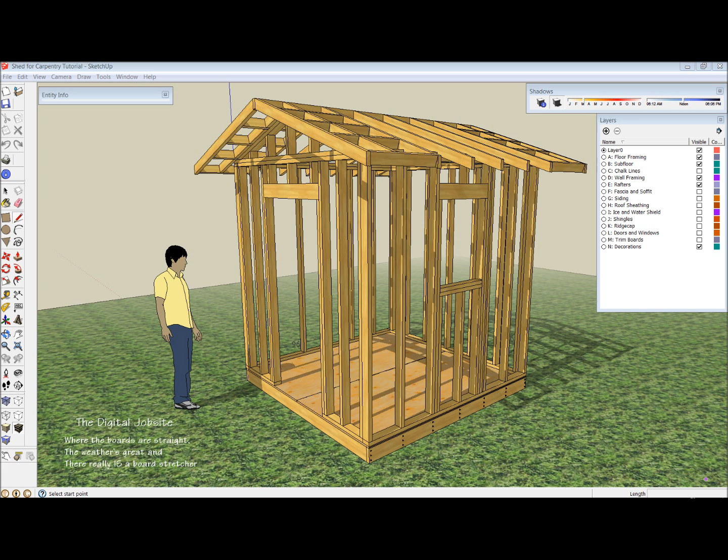In this video I just want to go over briefly the assembly process and principles of squaring up the floor framing to put the subfloor on. So we're going to turn some layers off here and get down to the part of the model that we're going to discuss, and that will be the floor framing itself. All you're looking at here is 2x6s used to frame this up.

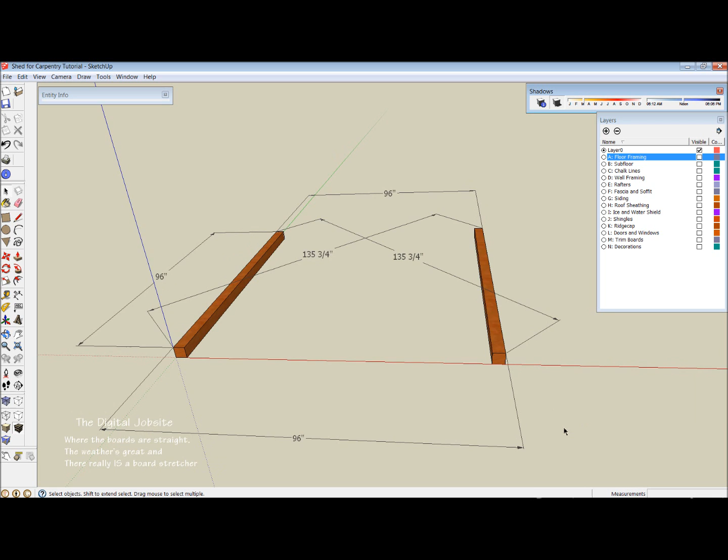If I turn off the floor framing, we're left with nothing but a couple of 4x4 sleepers, or a foundation more or less in this case, and a bunch of dimensions. I'm going to assume that the site where you'll be building a shed is relatively flat. To accommodate the shed being built flat, a person would need to have an area roughly 8 feet square, and have it level. You could do that by cutting these 4x4s exactly 8 feet long to start off with, and then laying a 4-foot level on the top of them.

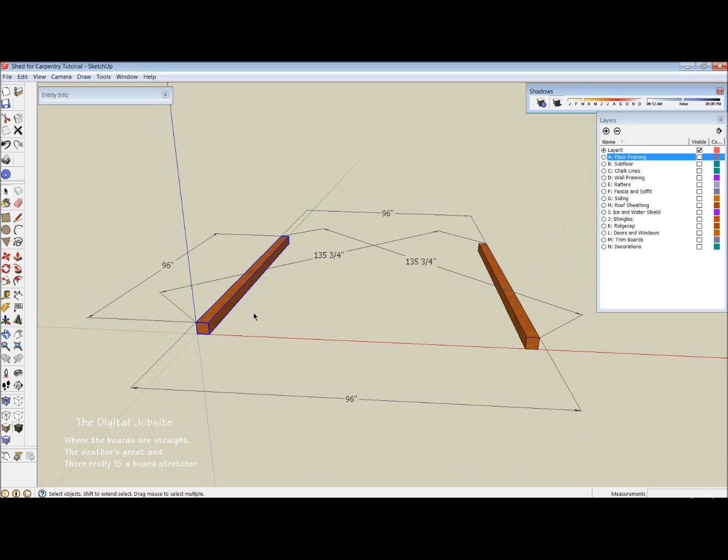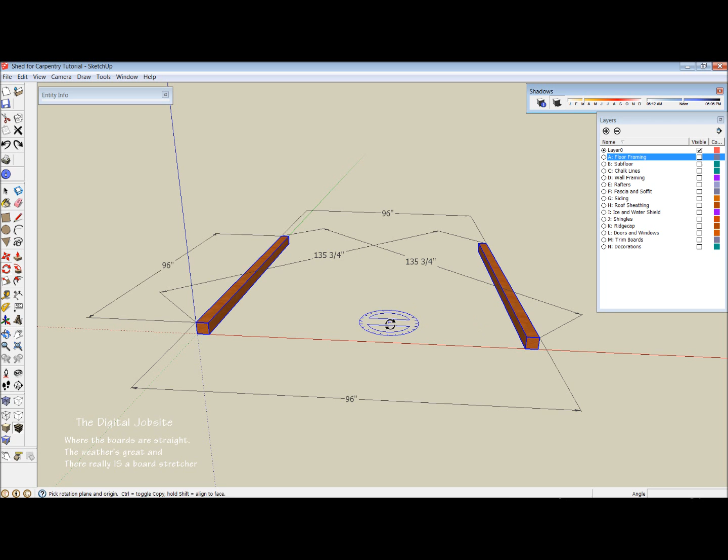A person could turn the two 4x4s 90 degrees and re-level them, and that would make an area that was level enough. Some of the video series on Fine Homebuilding for the tool shed and the garden shed, I believe those go through the process of using concrete blocks buried in the ground to establish a level platform for building a shed on.

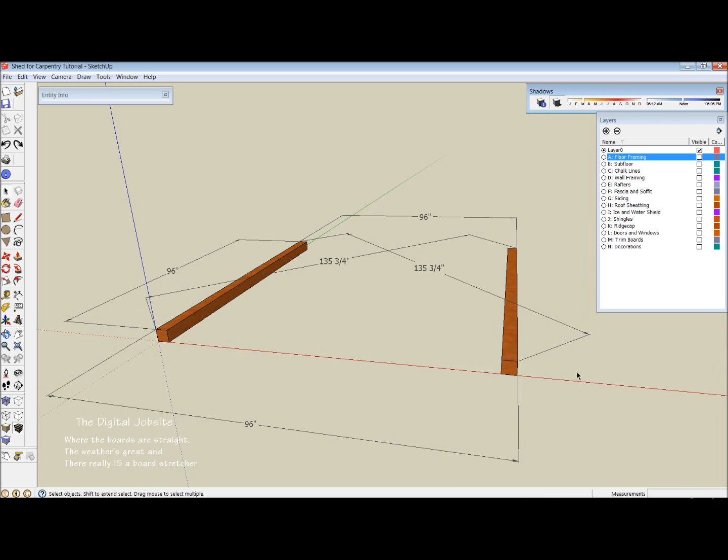But to keep this video simple, I'm just going to assume that you're working with an area that's flat enough, and with that advantage, a person can just lay 4x4s down on the ground, put the 2x6 framework on top of it, and then square it up. So that's what I'm going to talk about here. Oops, not the subfloor, let's take the floor framing.

I've got this geometry grouped here, so I'm going to explode the group and take one of these members here, the rim joist. Although I have the move tool, it keeps coming up with that rotate icon that I don't really want at this point. I'm just going to slide this one over this way 96 inches. If you're doing layout work, you've probably seen this already. It's nothing new, but carpenters tend to use hash marks.

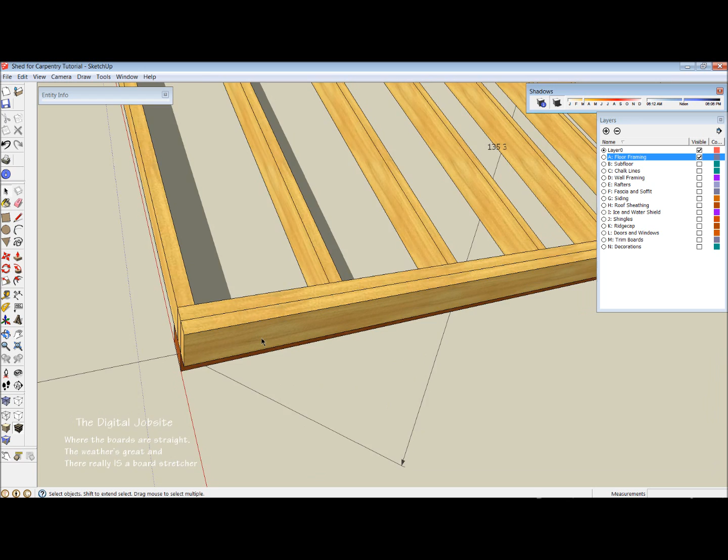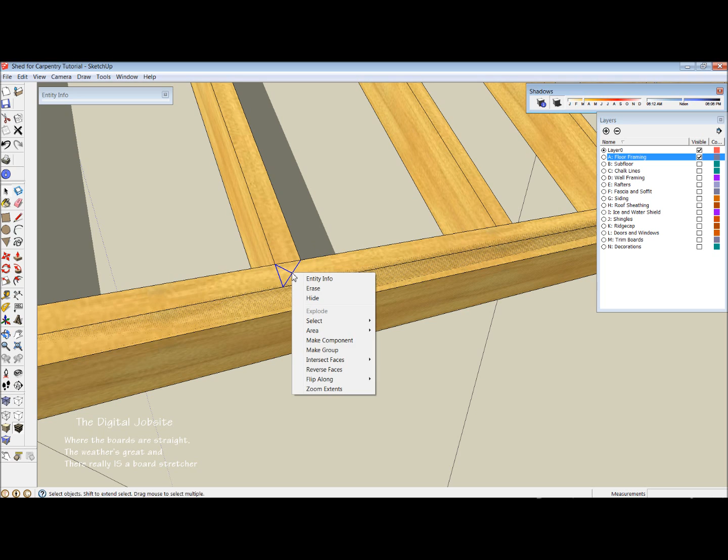I'm going to create one here. I'm just going to draw a 1.5-inch line, and then I'm going to draw an X on it like this, and we're just going to make this little thing here. I'm going to delete this little thing first, then we'll take this and make it a group. What this would be is a typical layout mark. I explained in the first video that starting at the end of a structure, you want to make sure you have your layout centers going to the center of the first member.

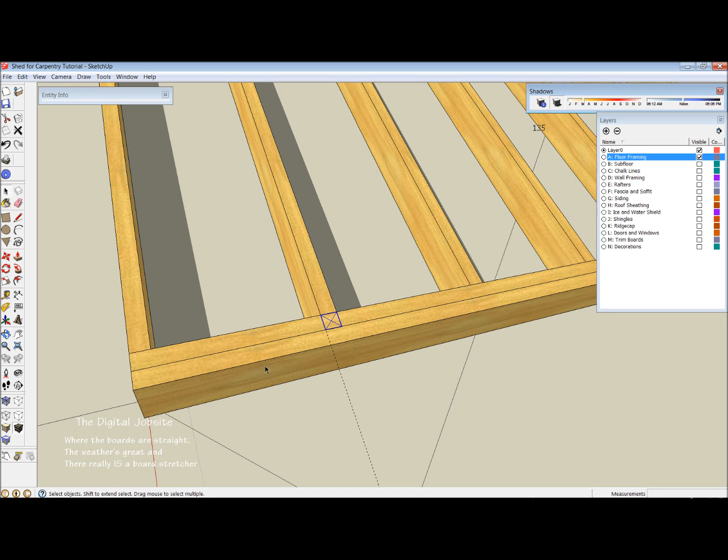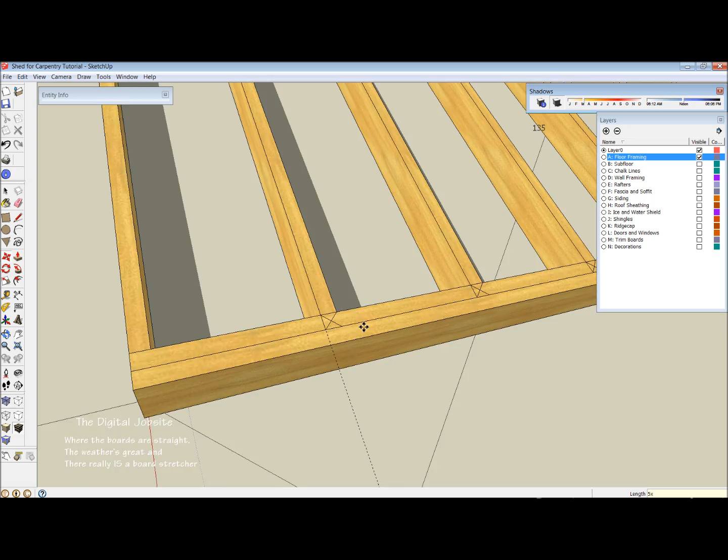In this case, it's 16 inches, but the first layout line goes to 15.25, and then these are copied, laid out with a tape measure. Oops, I missed my target there. These are just moved, laid out with a tape. We're going to go 16 inches, enter. Let's go 5x, enter, and zoom out. You can see we ended up with an extra one down here at the end, which we don't need. But that's what the layout looks like.

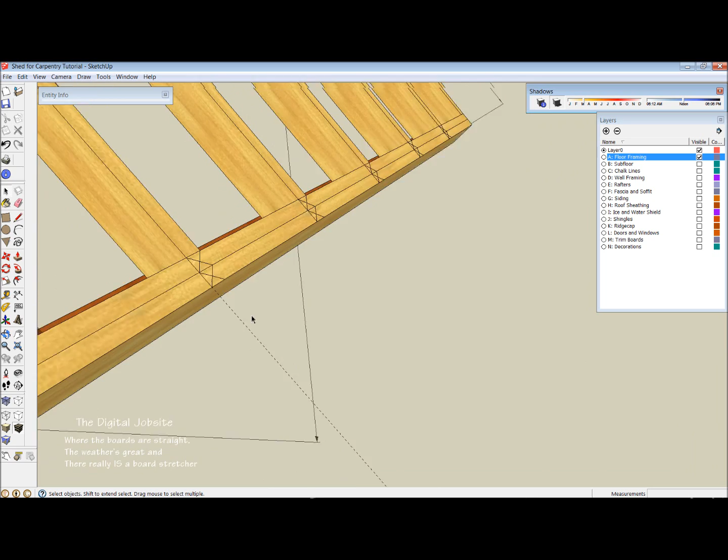If you were to lay out these plates, I would just make the layout on one of them and then transfer it to the other board. That's typically what a 16-inch on center layout would look like. Line up the edge of the board with the line, and then the member falls on the X side of the line.

So I'm going to take that, and let's see, I'm going to delete that. I got a little clumsy here on my process. As you can see, I didn't work this out before doing the video. So I'm selecting and deleting things.

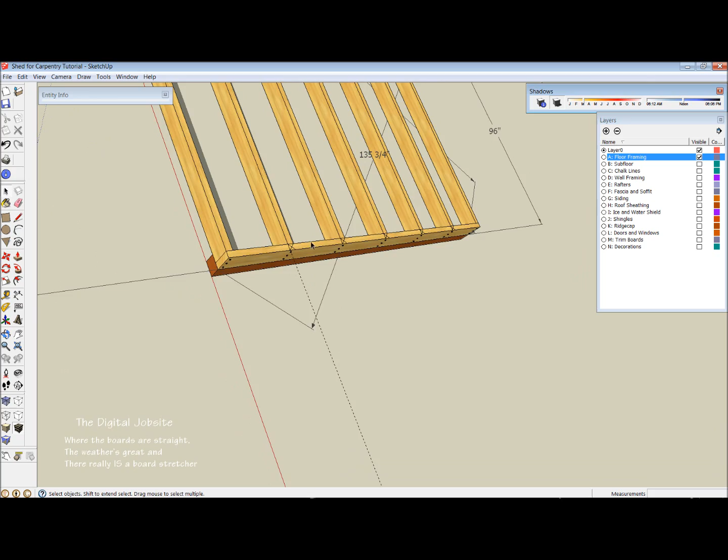Okay, so now I can take this and the marks. I'm going to make a group out of that. And I'll just copy this group over to the other side.

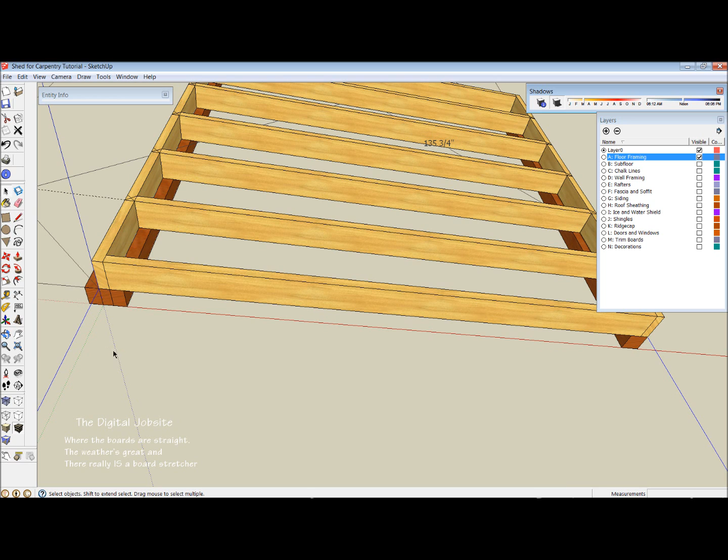Looks like I included a 4x4 in my group, so I'm going to explode that and delete the 4x4 out of it. Okay, what I was showing you there, rather clumsily, is the way to do layout: just by pulling a tape measure, drawing a straight line, squaring it up across the two rim joists, and then separating them.

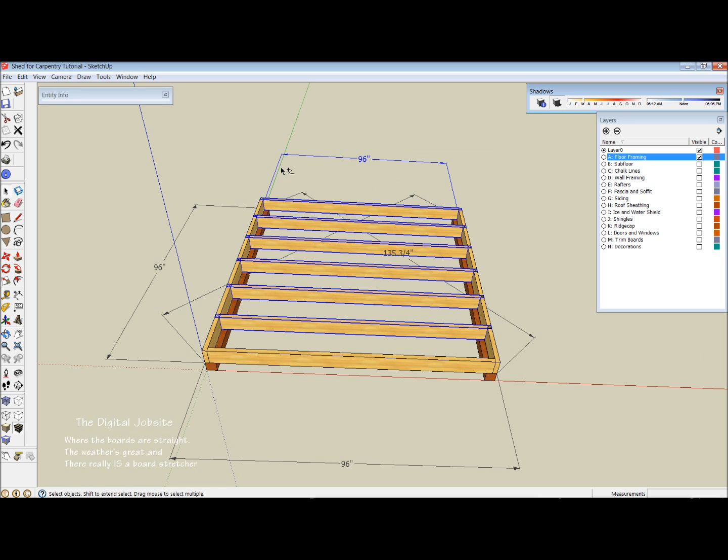All the joists in here are cut to the same length, and we want to end up with 96 inches of total width to fit our plywood and siding, etc. So the joists are cut at 93 inches. If I take these joists out of here, it kind of shows the process, and I actually put nails in the end of these joists, made little nail components, so that you could see a typical nail placement.

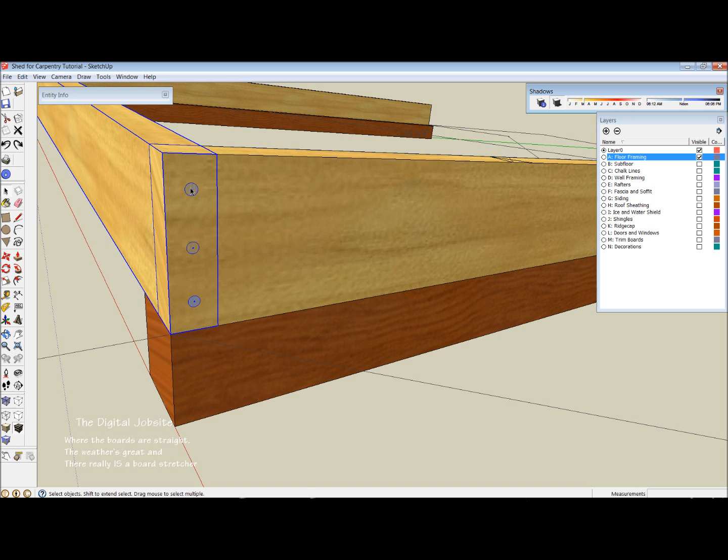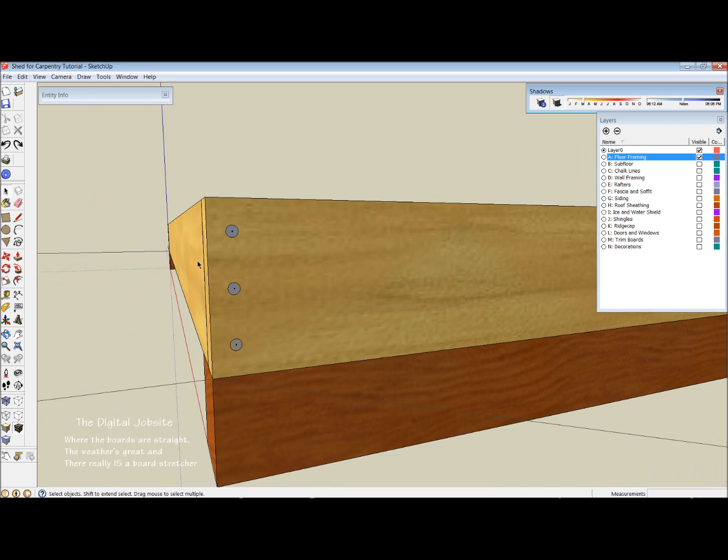The 3 nails is good. It keeps that board from twisting, and this nail should be 3/4 or an inch from each end. Those nails driven straight in to get the best holding on that floor joist. Another thing that you'll want to make sure you do is, while on the Digital Jobsite the lumber is perfectly straight, in the real world lumber almost always has a crown to it. When you eyeball it down, there's a hump in it in this direction.

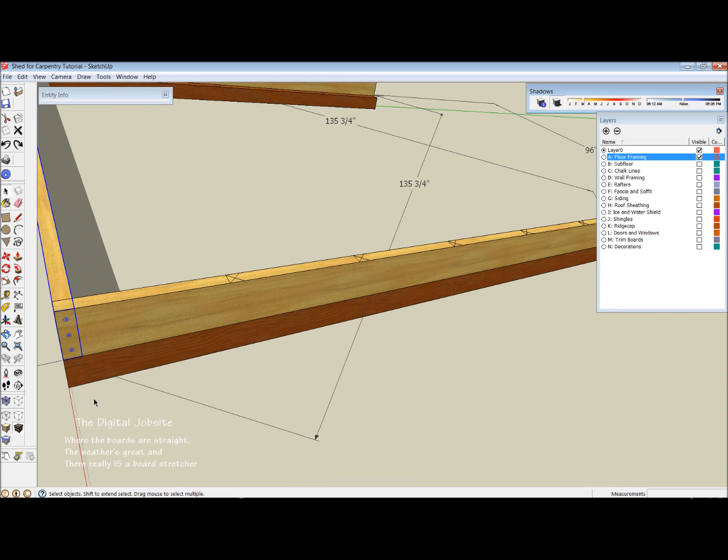Put that hump up, the crown up, so that then when weight is put on the floor, it straightens out the lumber. If you put it in crown down and add a load, it just makes the sag worse. So we would just take and nail joists in on each of the marks. Just going to move one over here.

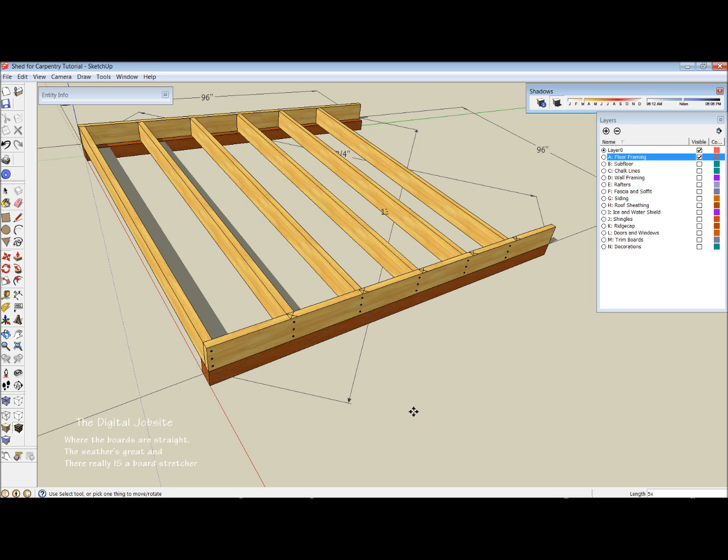This is where the Digital Jobsite's a great thing, because I can just say 4X, and I have all the joists in there, and you can see what I did there is I moved that joist over 15 1/4 instead of 16 inches. So I'm going to back those off. We'll move the first joist, move it and copy it, the layout, and then I'm going to move and copy again. The first one, move 15 1/4. The rest of these will be 16 inches. And we'll go 4X, enter.

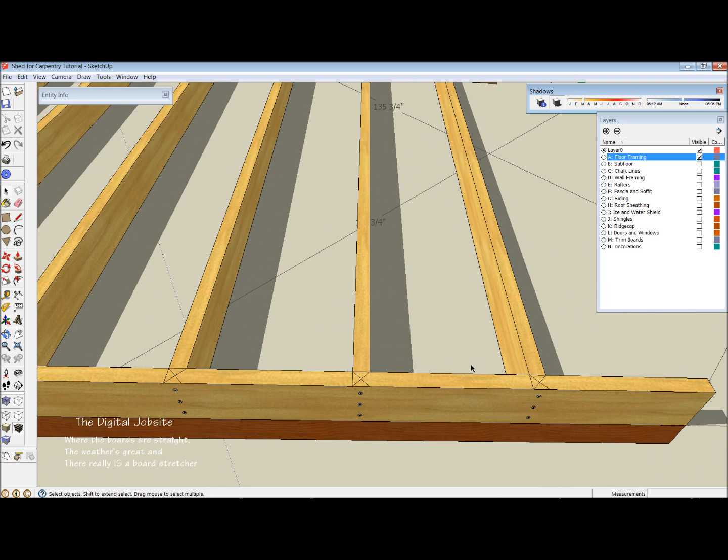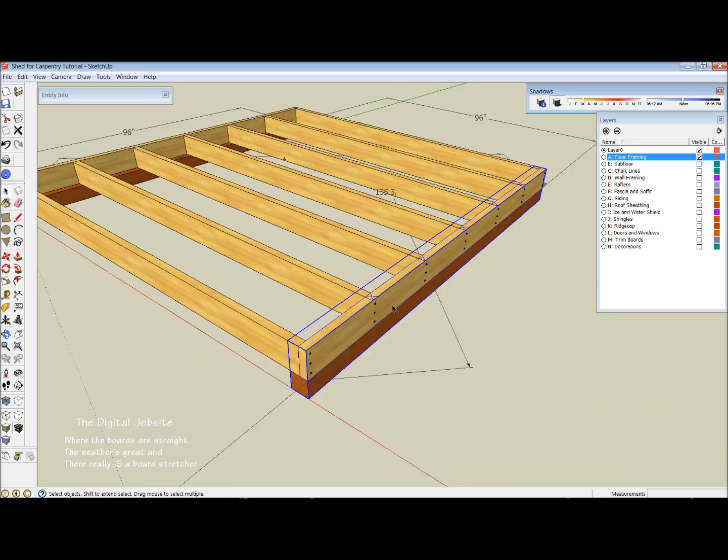And then we take one more copy and move it out to the end. So you can cut these boards. Make sure that if you buy an 8-foot 2x6 at the lumber yard, chances are it'll be 8 foot and a half inch or 1/4 inch. So trim up and square up the ends and make it exactly the dimension you want. In this case, 96 inches. Same thing with these center joists. Make sure they're all cut accurately. And you'll have this floor framework set up.

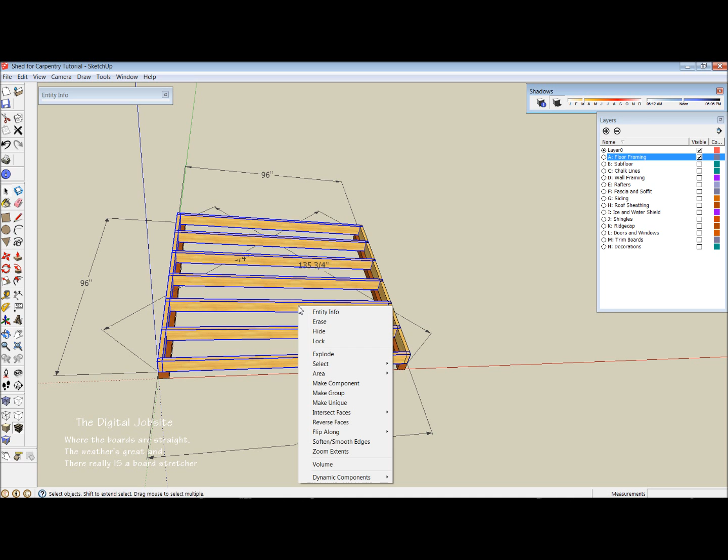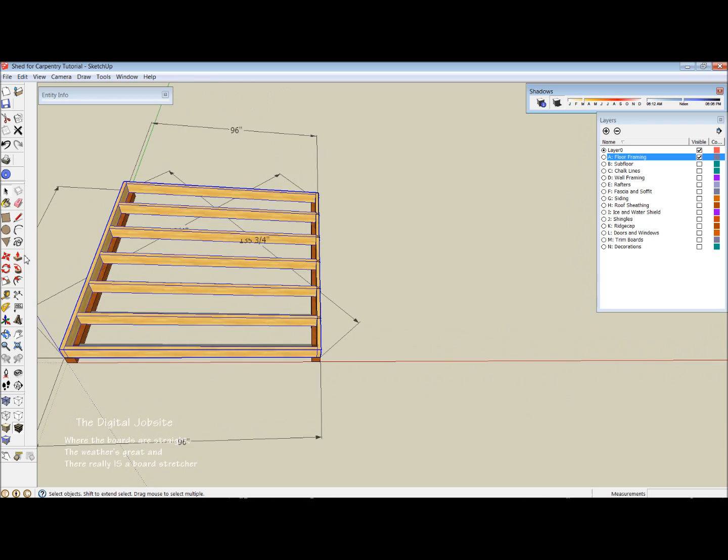I'm just going to regroup this. See if I can select it by pivoting around. I got all those joists, and I don't want to include that measurement. So by holding Shift, I can delete it from the selection. Right click and make a group. So in this case, I have this floor joist assembly, and it's equal width from one side to the other, and the two rim joists are the equal length, but the whole thing might not be square.

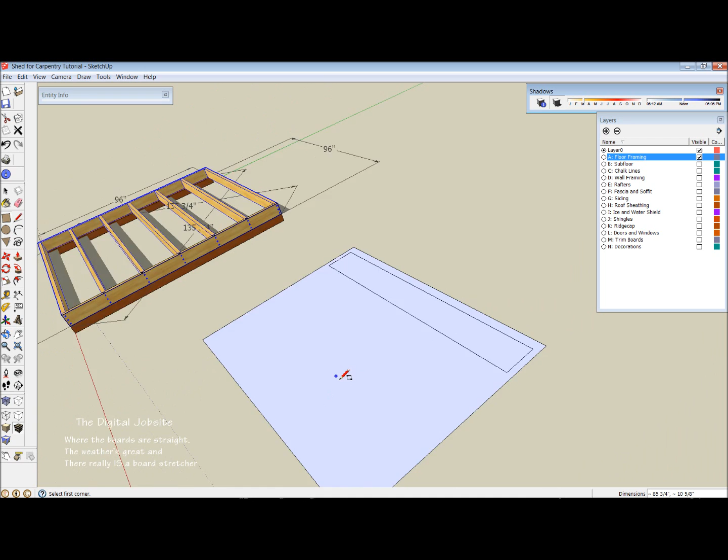And so I'm just going to do a quick demonstration here of how square works, and show you this. I can't do it with that group of components because the way the geometry is set up, it wouldn't behave. So I'm just going to draw this quickly. Let's see, 4x, enter. 3x, enter. Okay.

I could have drawn this ahead of time to save time on the video, but I did not. This way you get to watch me fumble around and draw a little bit.

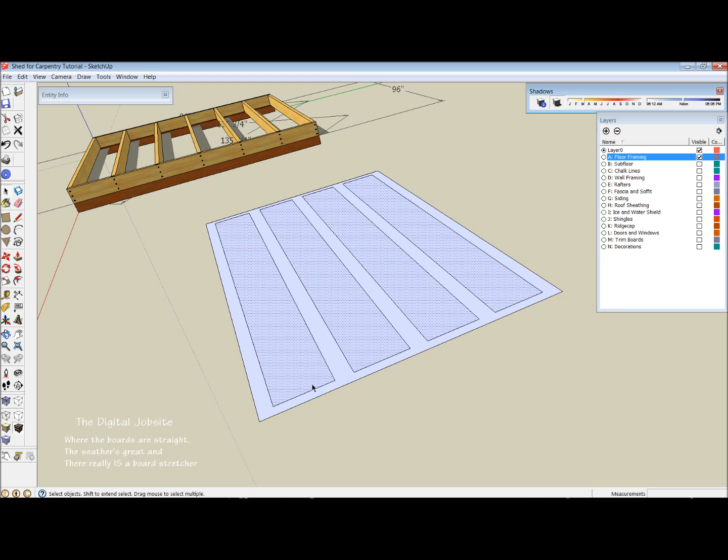I'm holding shift, selecting these areas and getting rid of it. Okay, so now we have this little bit of geometry, and you can see that it roughly represents the top of these floor joists. So I'll put a couple dimensions on here. The actual dimensions are irrelevant. I'm going to show how it's squared. You can see when it's squared up.

So there's the width and length, and then we'll click a couple diagonals here. We have to make SketchUp behave so that it goes on the diagonal. Drawing this stuff on the Digital Jobsite, everything comes out exactly square the way we drew it. But as I was describing, just because the two sides are equal length, the diagonals might not be. You might have a parallelogram, and I can demonstrate that with the move tool here.

So if I shift this, you can see that although the 89 and 7/8 stays the same, the diagonals are different by almost 10 inches, and that's an out of square situation. So once this is shifted into place, the whole assembly ends up square.

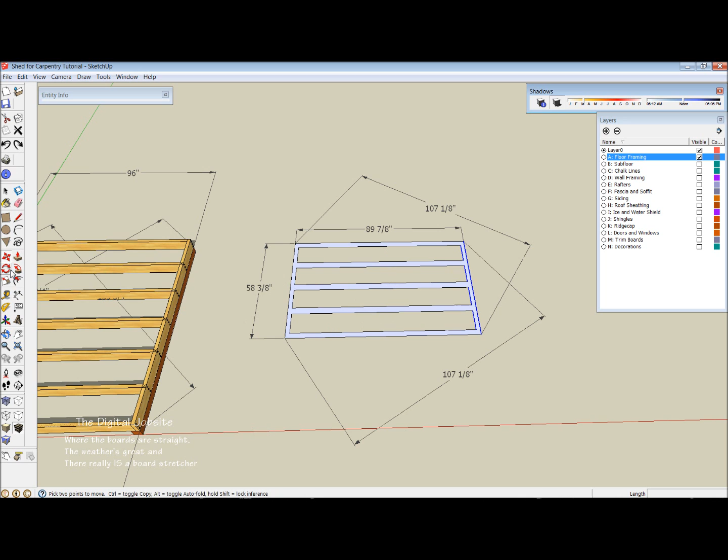The other thing, if the joists weren't cut the same length, you would have a situation like this. Let's see if I grab the right tool. I did. So this is another way it can be off and out of square if the floor joists weren't all the same length.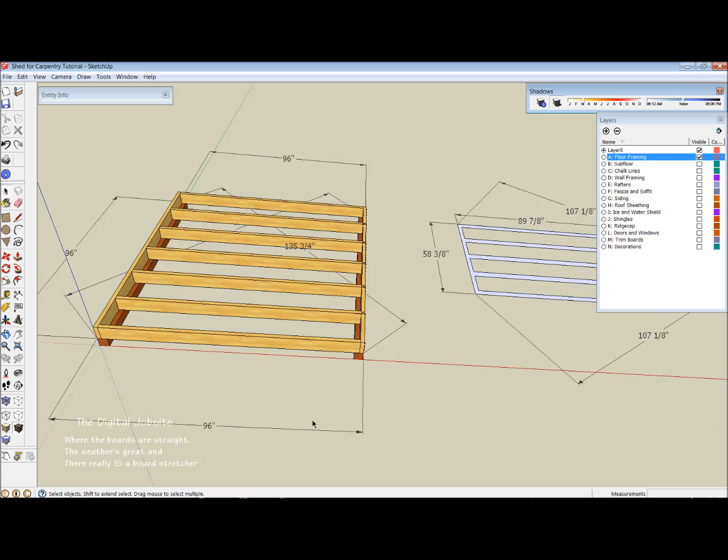So with that in mind, after you've built this assembly with the rim joists, 4x4s, and floor joists, it might not be square. And I'm not really going to get a true indication of what that looks like by sliding this floor joist, because it's not really connected the same way. But I guess maybe it demonstrates a little bit more what I had in mind. You can see how the diagonal dimensions are becoming unequal.

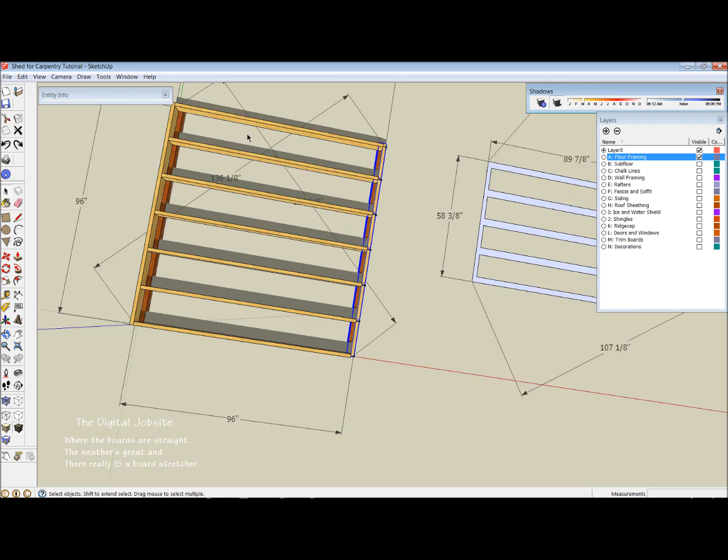So when your floor assembly is all put together and nailed up, you could stake one side of this down to the dirt with a couple wooden stakes and slide the other side back and forth until the diagonal dimensions are equal. Then you know it's square enough to put the plywood on it.

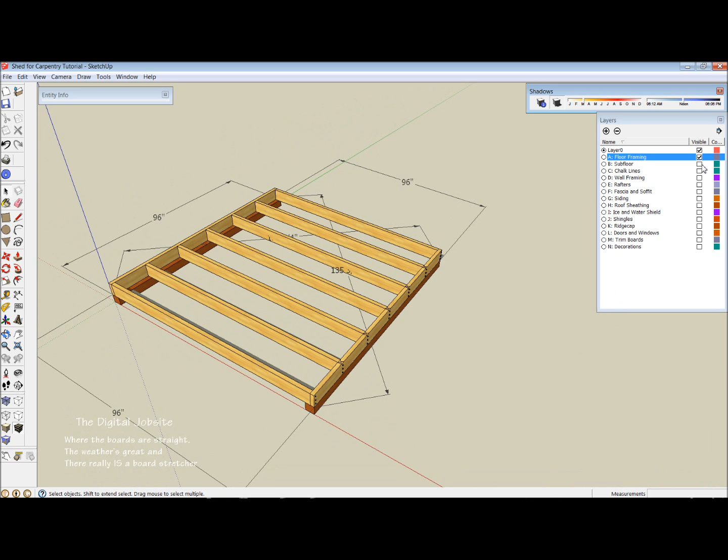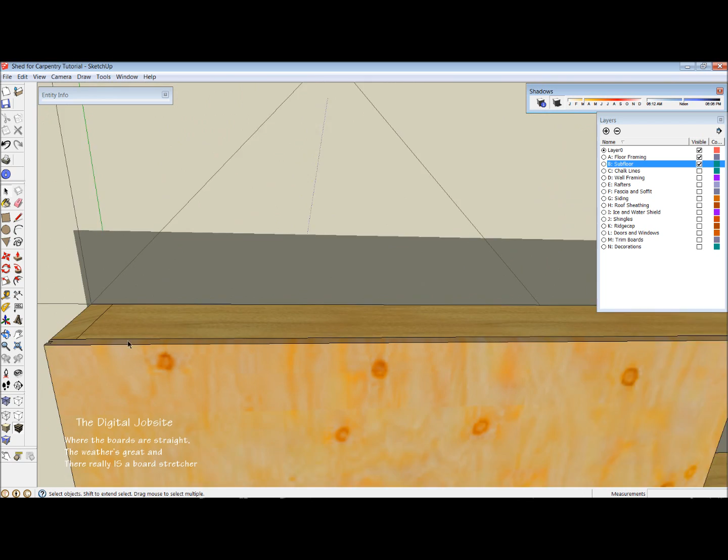So I'm just going to delete this batch of geometry here and show the subfloor. I put both sheets on at the same time, so I'm just going to temporarily delete one of these and show that when the floor assembly is square, looking down on the top, the plywood will line up with the two end joists, and it can be all attached down, whether you decide to use screws or nails or glue or all three or a combination thereof.

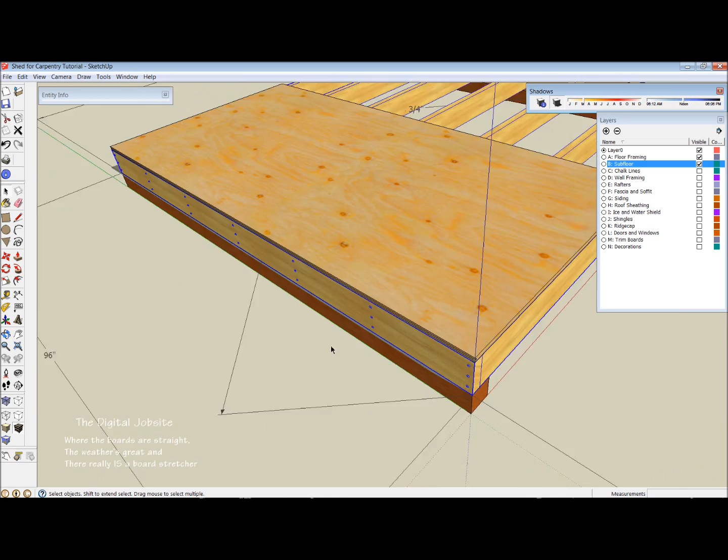In the middle here, something that won't show up in SketchUp, but each floor joist can have a side-to-side bow in it. So the proper way to install that plywood is to start on a straight edge and line up the edge of the plywood with the rim joist and nail it all along the edge. And then you can move to the end and straighten out the joist, bowing it in and out till it's flush with the edge of the plywood, and then fasten that edge.

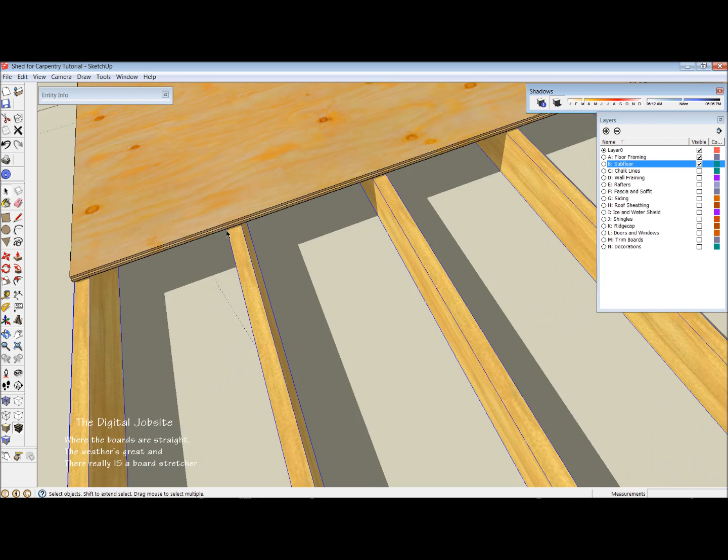And then by hooking a tape measure here and going 15 1/4 to the first joist, you can start here at 15 1/4. The next one is going to be 31 1/4, 47 1/4, and so forth, all the way down to the other end. It should end up with a total of 96.

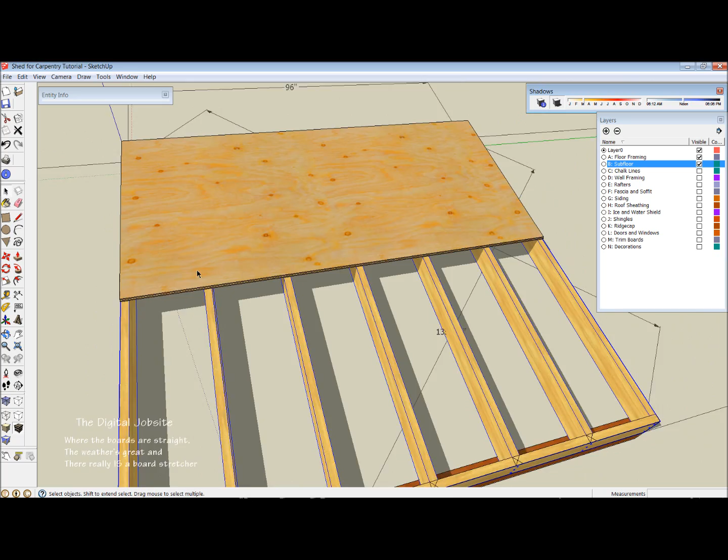But if you straighten out one on the end and then line up the other joists in the middle to their 16 on center locations and nail them down, then all the floor joists will come out straight across and accurate, and this will also reconfirm the squareness of your floor joist assembly.

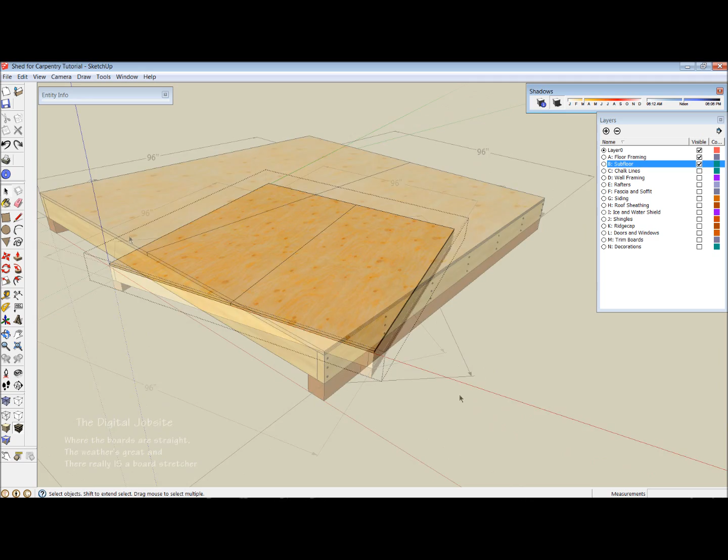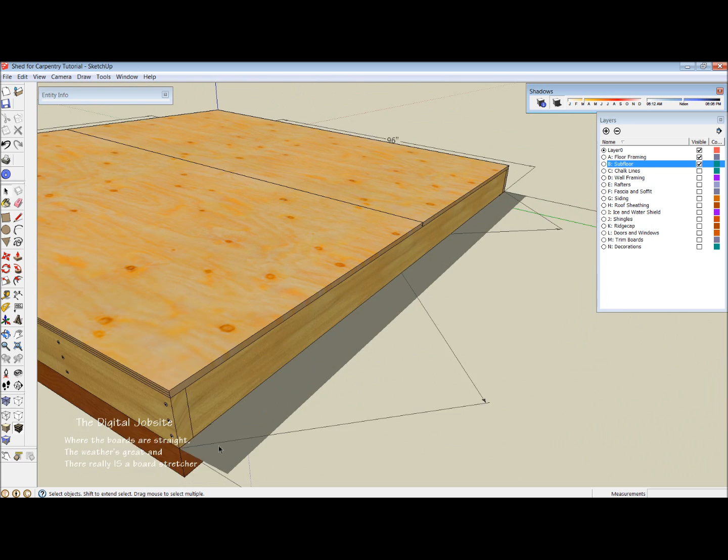And once those things are all done, I'm just going to use my back arrow. Hopefully, once that's done, I would nail along this edge of this sheet and make sure that the rim joist here and the corner of the plywood line up on this side, and then drive the tongue and groove plywood together and nail each subsequent joist. When you get over to this corner, everything should be all nice and flush and straight, and you'd have a sound and solid flat deck surface.

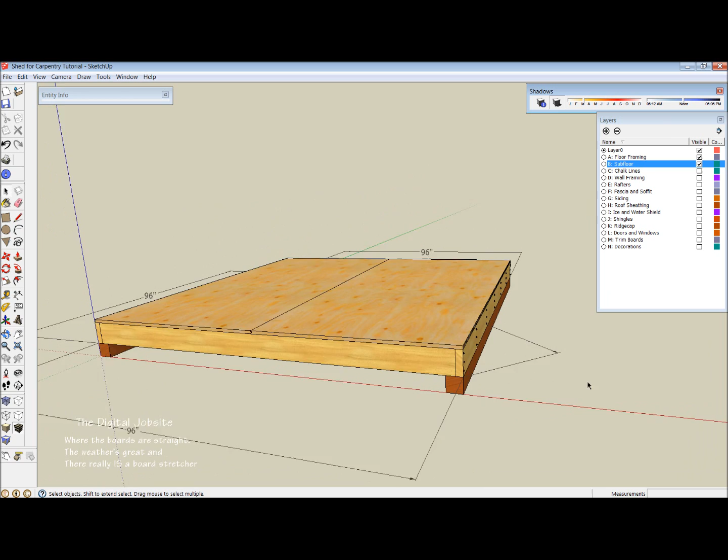You might want to recheck it at this point to make sure that one of the corners hasn't dropped and made the deck surface out of level on one of the sides or another. But after that series of steps, you should have a very square and very level and flat sheeted floor framing assembly.

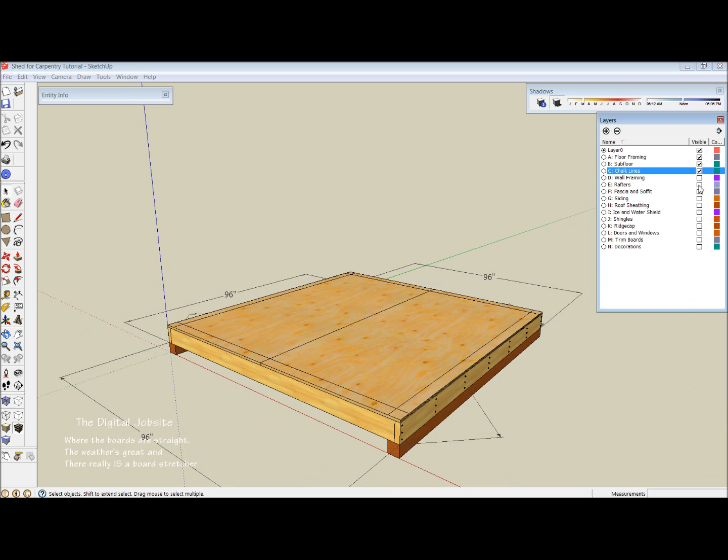And from there, you're ready to go to the next step, which will be to snap some lines and do some wall framing, rafters, fascia, soffit, siding, roof sheathing, ice and water shield to get it dried in, shingles, ridge cap, doors, windows, trim boards, and finally the decoration and final inspection.

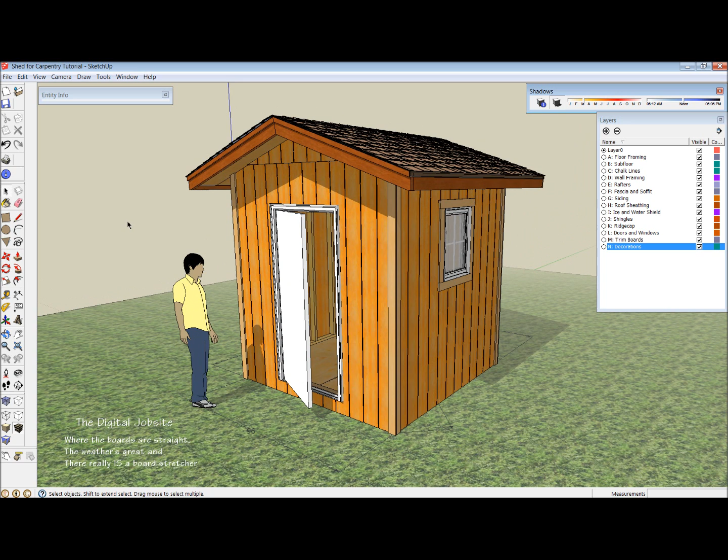I'll do another blog post in probably 1 or 2 segments. The next one will be to show steps for doing the wall framing. So if you stay tuned in a week or so, when I can get that video put together, we'll go through the steps for framing the walls.

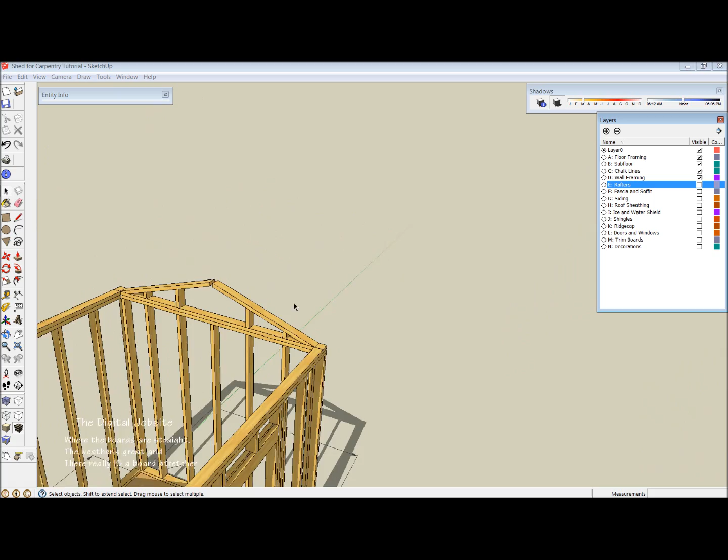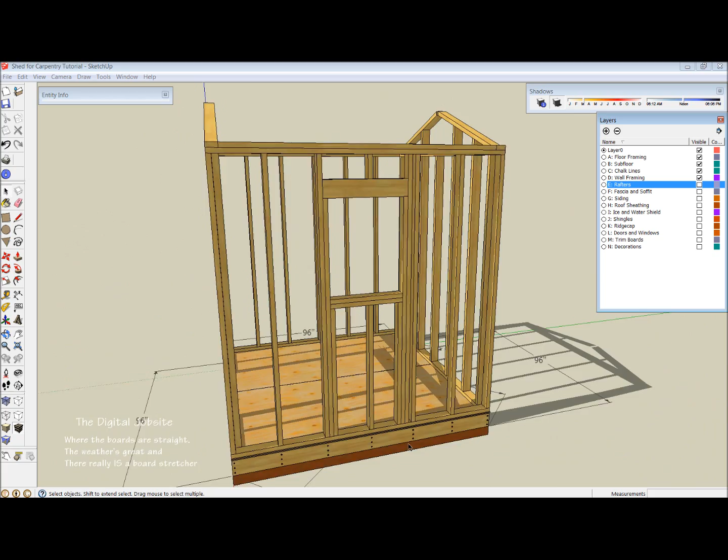And as you can see here, these studs don't run all the way up to the rafters. They're interrupted by these plates. It makes it a little more simple to frame and to understand, but I'll also cover alternate methods to balloon frame these gable end walls so that the studs go all the way up and you don't have this extra set of plates in here. But that'll be covered in the wall framing segment of this shed building tutorial.

So I hope that's helpful and gives you some insight.